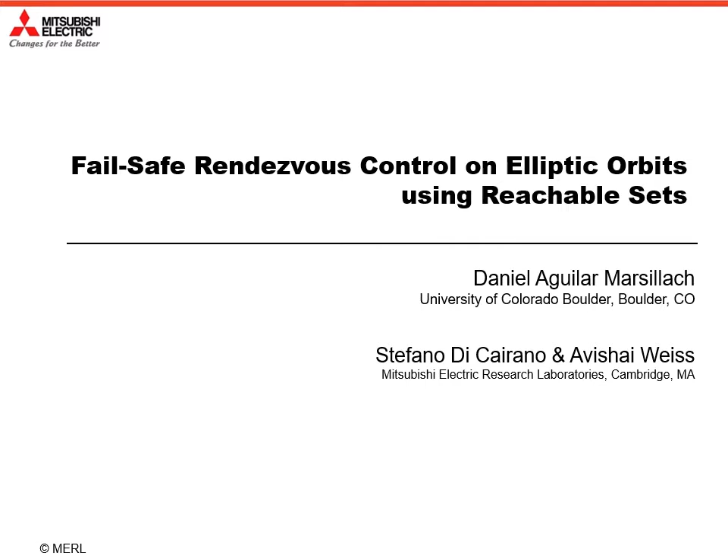My name is Daniel Aguilar Marsillach. I'm a PhD student at the University of Colorado Boulder in the Department of Aerospace Engineering Sciences. Today I'll be talking about the work that I did as a summer intern at Mitsubishi Electric Research Laboratories with Stefano Di Cairano and Avishai Weiss. This work is related to spacecraft rendezvous, and in particular I'll be talking about fail-safe rendezvous control on elliptic orbits using reachable sets today.

I just want to give a brief introduction of the rendezvous problem for spacecraft missions. We can see an illustration of that here on the top right, where we have the Dragon capsule by SpaceX going to dock with the International Space Station. So typically we have a controlled chaser, which would be the Dragon capsule here, which aims to move towards and remain near a target body. That could be the International Space Station, a different satellite, or even an asteroid like Bennu.

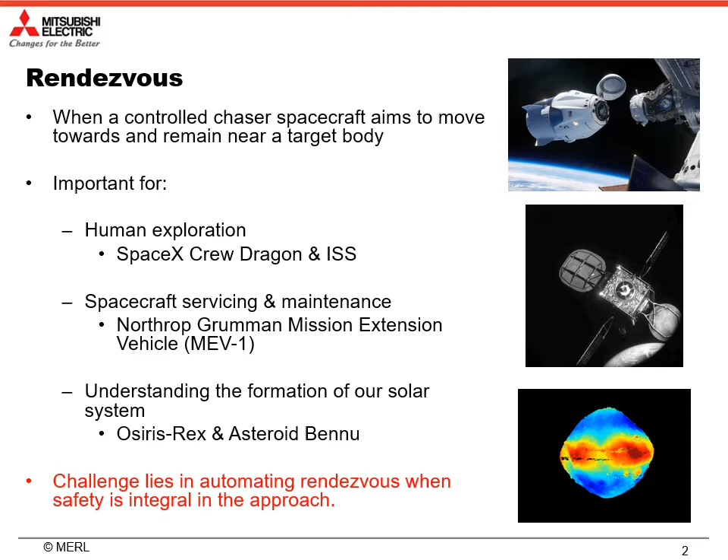And indeed, rendezvous is important for several reasons: to further human exploration, and for spacecraft servicing and maintenance, since we know there's going to be numerous satellite launches in the coming years. We're going to have record-breaking constellation sizes, and potentially some of these are going to require servicing and maintenance, which will inevitably require rendezvous and docking procedures. It's also obviously important for the acquisition of scientific data to understand our solar system. But the challenge really lies in automating this process, especially when you're trying to do this in an inherently safe approach. And that's the topic of discussion in this talk.

So here we have the rendezvous description. Geometrically speaking, we have the inertial frame that's centered at the center of mass of a central body. This could be the Earth. We have the chaser spacecraft and we have the target. These are their inertial position vectors. They are both orbiting the central body, and what is of fundamental importance really is the relative position vector of the chaser with respect to this target, since we will be using this throughout the safety analysis and ensuring that our safety is not compromised.

We also have a notion of a Hill frame, which is a special kind of coordinate frame that's attached to the target right here. It moves with the target along its orbit, so it's a co-moving frame. It's useful to map relative positions and velocities into this frame for visualization purposes, but also because we can see what the states of the chaser would look like as seen by the target. So we'll be using this throughout our implementation here and in the figures I'll show you later.

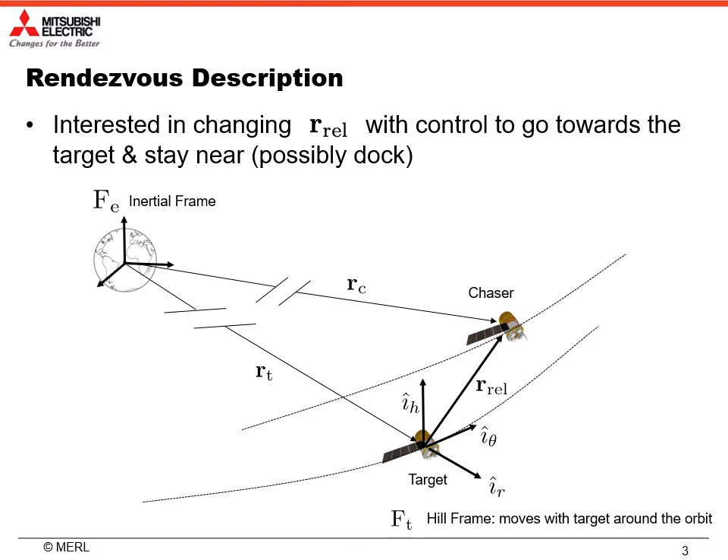So the goal of safe spacecraft rendezvous is really to minimize some kind of performance metric while satisfying your safety constraints. This performance metric could be fuel consumption, control usage, or something similar. The particular kind of safety we're interested in here is known as passive safety. This would be the case where, despite a total loss of control, your chaser would be on a free drift trajectory that avoids entering some sets. Those sets are going to be defined now as the approach ellipsoid or the keep-out sphere. They're both centered at the target, so in the Hill frame they're centered at the origin.

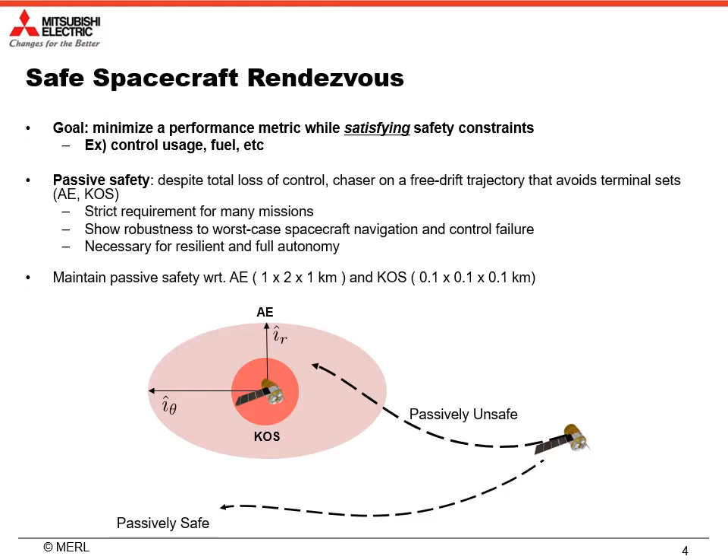The keep-out sphere is contained inside the approach ellipsoid, and we use these two sets to basically quantify and in some sense qualify safety. It's a strict requirement for many missions that we have to be able to guarantee passive safety of our trajectories or our approaches. And indeed, we'd be showing robustness to a worst case spacecraft navigation and control failure. So if we're going to have several spacecraft that are performing these rendezvous in an autonomous fashion, we would also want them to be subjected to these safety requirements, and we would want them to be able to guarantee this. So it's indeed very important for full autonomy to be able to ensure that collisions can be avoided.

So traditionally, passive safety is enforced through the design of trajectories offline and on the ground. This is done by understanding the orbital mechanics of the problem and going from there. Typically, there are several ways to do this, but you in fact just get a reference trajectory that you then track. Prior research in this area has then moved from going offline to an online implementation, where the idea would also be to deploy this on an autonomous spacecraft. And in this case, the safety constraints are enforced by propagating the current state at a given time forward to several future times, and ensuring that none of those states enter your terminal set S sub f, as we've denoted it here. This has been implemented in a convexified approach and using the full non-convex constraints, but in essence, you create a very large optimization problem.

Our approach is a bit different. We characterize the unsafe state space offline using reachable set theory. So this would be visualized by this area here. It's a 6-dimensional region of state space. And then online, what we're going to try to do is ensure that the chaser does not enter the unsafe state space, such that in the event that all thrusters fail, you would passively drift away from these sets and you never enter. Whereas if you were inside here, you would passively drift in there.

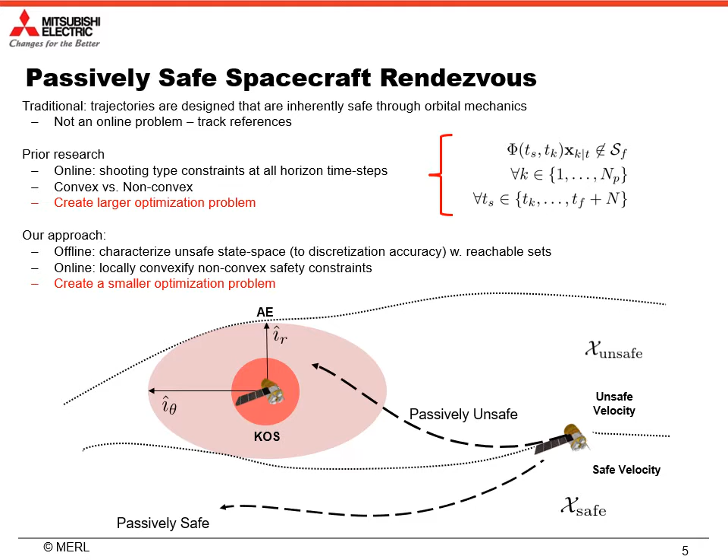And by doing this, we've created a smaller optimization problem that is easier to implement on board. So we actually characterize the unsafe state space by using backwards reachable sets, and we can do this recursively by these two equations. If we have a terminal set S sub f, which represents our approach ellipsoid or our keep-out sphere, we can successively calculate the sets of states that would enter the terminal set in a given number of time steps at the final time. And it's fundamental that we do this without any control because that's what passive safety requires.

Also, because the portion of the rendezvous that we're interested in happens so close to the target, linearization of our dynamics relative to the target is actually very accurate, but it also has the added benefit that it preserves ellipsoidal sets in the BRS computations if you have an ellipsoidal terminal set. And we can see this right here. So this would be a backwards reachable set between a prior time and the final time, and indeed it's just a function of your state transition matrix.

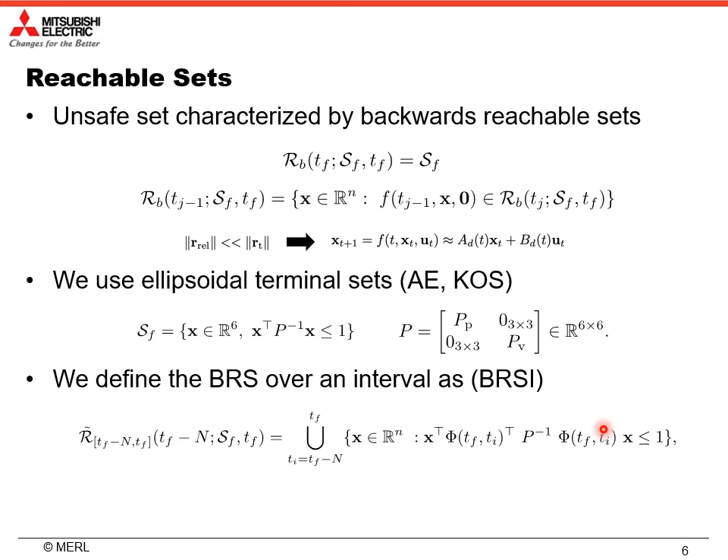And because our target is in an elliptical orbit, which is periodic since it's unperturbed and Keplerian in this case by assumption, we're going to get time-varying backwards reachable sets. So what we're going to see is that wherever you put an approach ellipsoid, let's say you put it either here or here, and you take a step backwards in time, or 2 or 3 steps, doesn't really matter, the ellipsoids that result from that mapping from a prior time to the final time are going to have a different rotation with respect to each other, and might also even be extended differently or amplified differently in some sense. This is a result of the time-varying nature of the dynamics here. So we would have very slow dynamics at apoapsis, so perhaps smaller changes on our ellipsoids here, and we'd have much faster dynamics at periapsis and perhaps much larger changes in our ellipsoids over here.

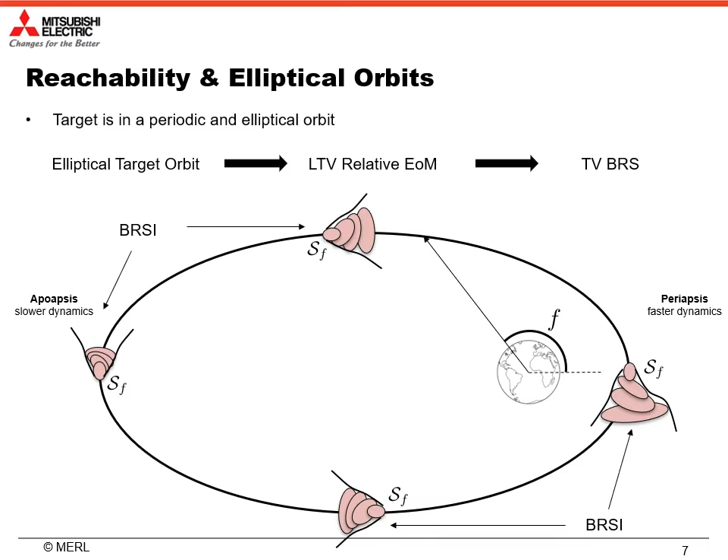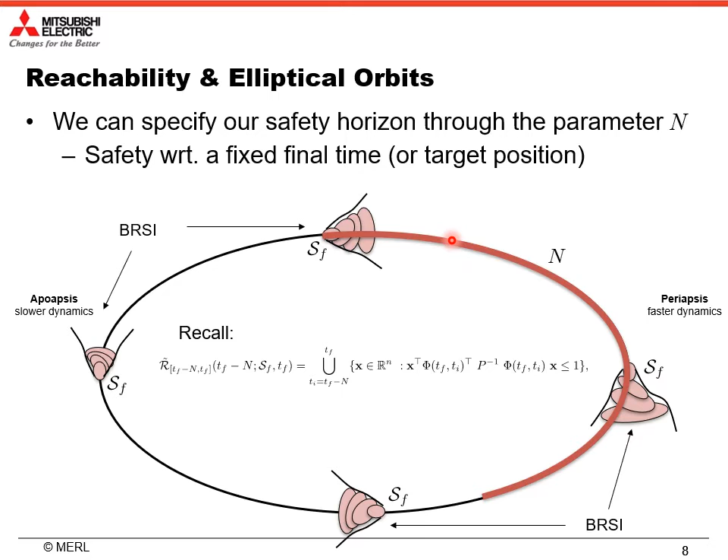So recall our definition of the backwards reachable set over an interval, where we found basically the set of states that would enter the terminal set in exactly n steps or less at this final time. So if we were to start here, and we've already defined a horizon n, or a number of steps n, then we would have found a set of states along the orbital arc, or relative to the target, that would slowly but surely be propagated naturally and end up going inside of the terminal set at this exact moment in time. We're interested in staying outside of this. So again, the backwards reachable sets are unsafe sets, and we're trying to stay outside of those. By being outside of those, in this case, if we just use this expression, we would guarantee that we would not collide at this moment in time. However, we could collide before or even after, so we have to take that into account in our analysis.

So if we want to be safe with respect to multiple target positions or along the orbit, we can parameterize that by the final time. That's why I'm saying we can be safe with respect to many final times. We need to take a union of the backwards reachable set over an interval. So at every moment in time, we have a different backwards reachable set over an interval because of our LTV system dynamics, and therefore if we take the union across the orbit or for a sub-portion of the orbit, we can at least maintain safety for a certain period of time. In our case, because we don't know the exact duration of our maneuver, we're going to do this for the entire orbit, because that way we can maintain n-step safety across the entire orbit, and we have just a general safety result. As a conservative measure, we're going to stay outside of this entire union of backwards reachable sets.

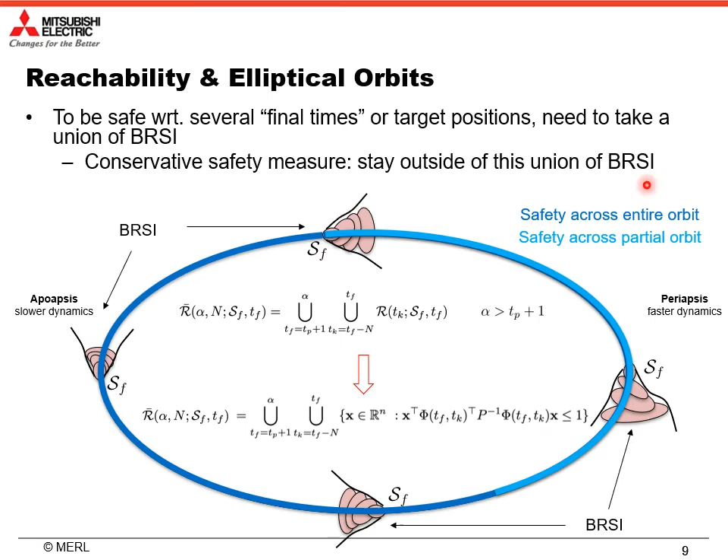We decided to use model predictive control in this work because the goal was to develop something that could potentially be used on board. So we need to have quick solutions. And if we have a linear safety constraint, which we will be talking about in the next slide, then this formulation just ends up becoming a quadratic program. And so once we solve that optimal control problem, we take the initial control and apply it on our full nonlinear relative equations of motion. So our control model is LTV, but our full simulation is done using the nonlinear equations of motion. And the QP is particularly important because if you're going to do this on board, you need to have something that is able to be solved quickly, and that's important for systems like satellites that have very limited computational resources.

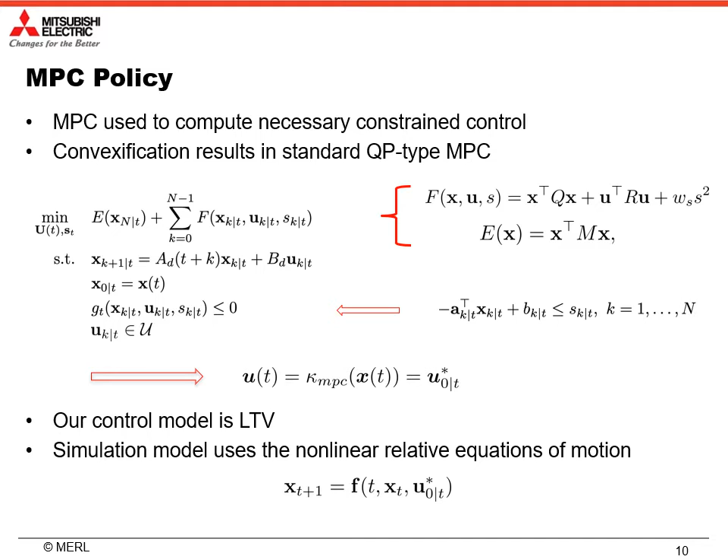So since we've already characterized the unsafe state space, which I'm showing by these weird ellipsoids on the right, we actually have a non-convex constraint. That is, every state in our horizon should be outside of this union or this volume of state space. We use an approach here that locally convexifies this safety constraint. So basically, imagine we had some states in our horizon. We project these radially onto that surface, and we figure out where's the point that is furthest away from the origin, because this would locally approximate the exterior of this union. And then we use the tangent at that point to set up a half-space constraint on every step in our horizon. We do this for every point in our horizon, and then we implement that in our model predictive control scheme.

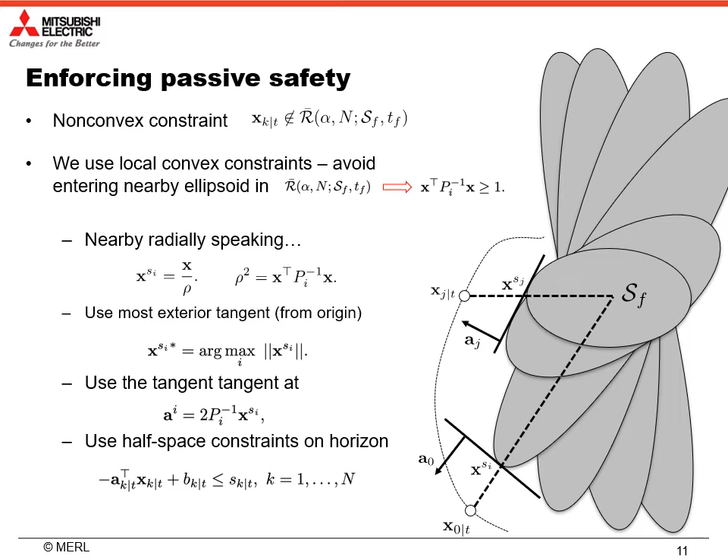So now that I've talked a little bit about the theory, I'll talk a little bit about how we implemented this in code in our algorithm. We've split the problem into really 3 phases, but the most important ones are these 2, where we first maintain passive safety with respect to the approach ellipsoid, and then we maintain passive safety with respect to the keep-out sphere.

So again, if we have an initial condition, we do all of our radial projections, we construct our safety constraints, and then we solve our QP, apply the control, update our state, and we repeat this until we enter a region that is near the approach ellipsoid, labeled by this bounding box, basically. Once we enter this region, we trigger the phase change.

And now, because the approach ellipsoid backwards reachable sets are a superset of these, by definition and construction, we are automatically going to be passively safe with respect to this one, as long as this was done appropriately and correctly, which we will show that it has been done. Then we repeat the same process, and again, once we get close to the keep-out sphere and we enter a bounding box around it, we trigger another phase change and we get rid of the safety constraints and we go to our final approach. This might mimic, for instance, or simulate the final docking procedure.

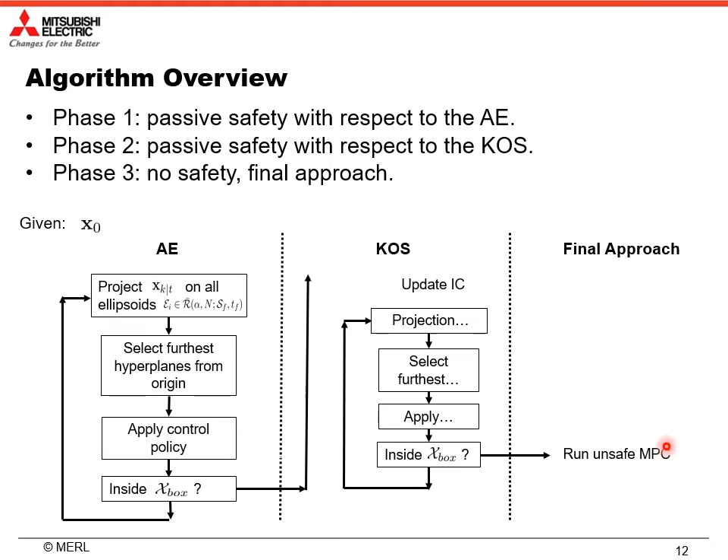And that's exactly what we see here. We see in the blue trajectory the implemented solution by the MPC. And if I were to sample particular points along this trajectory and propagate them forward without any control, they would drift away from the approach ellipsoid, as you can see here. Same happens once we enter the keep-out sphere phase. You see the actual passively safe approach trajectory, so we're getting closer, but in a way that if a failure occurred at any of these given moments, we would just drift away and we would never enter the set and collide with our target body.

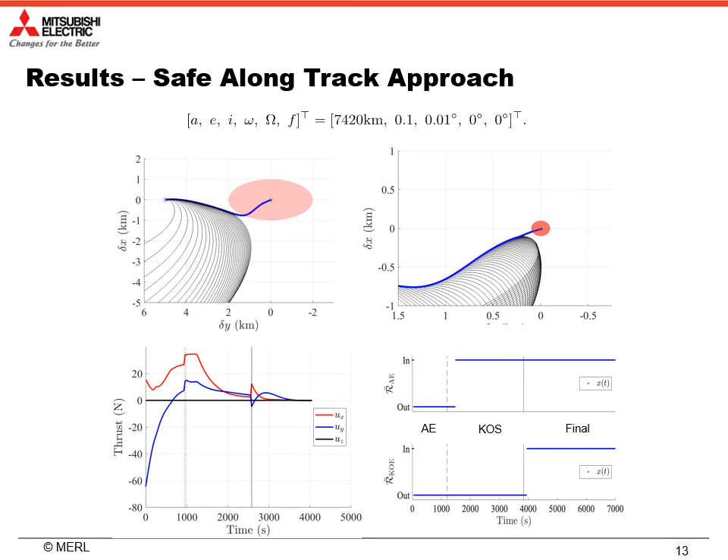We can confirm this by looking at whether our states along these blue trajectories are ever members of the union of backwards reachable sets. And indeed, they're never inside until we've triggered the phase changes in the mission approach. So we can show that we never enter, to the discretization level, those sets, and therefore we are passively safe.

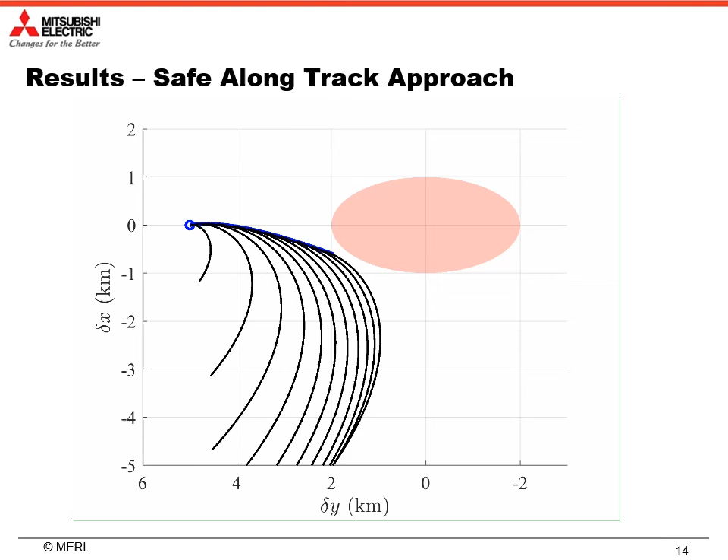So here I just kind of want to show an animation of how this works. We're approaching the approach ellipsoid in a safe way. We've sampled these trajectories. They drift away over time. Now the keep-out sphere phase begins, and the same process happens. As we get near it, if failures were to occur, they never enter the keep-out sphere. And then finally, we go in for the final approach.

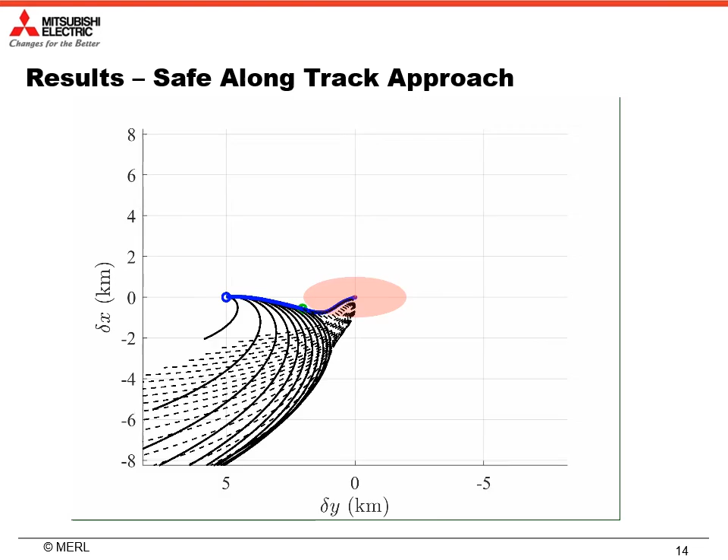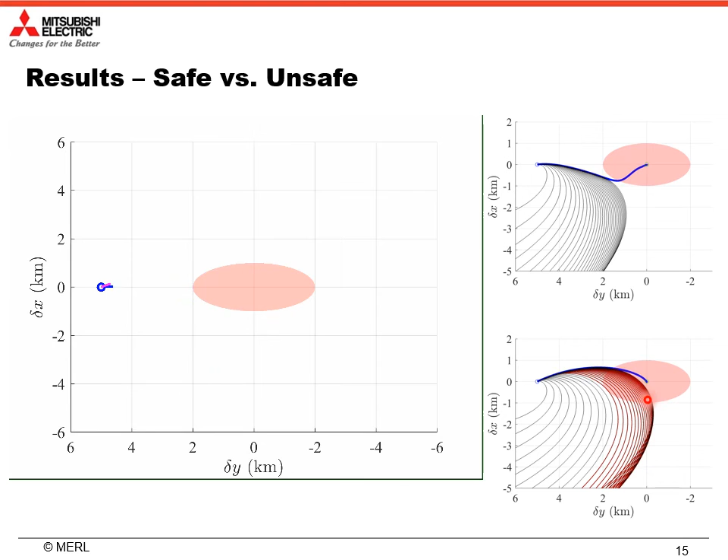So here I just want to compare the safe versus unsafe approach. The maroon trajectory in this animation is the unsafe one. And if a failure occurs at the exact same time, highlighted by this red dot, if you take that state and propagate it forward passively, we see that in this bottom case, it passively enters the set, and in the top one, it does not. We can see more examples of samplings that are unsafe right here. So we have several states that, when sampled and propagated forward, would enter that terminal set.

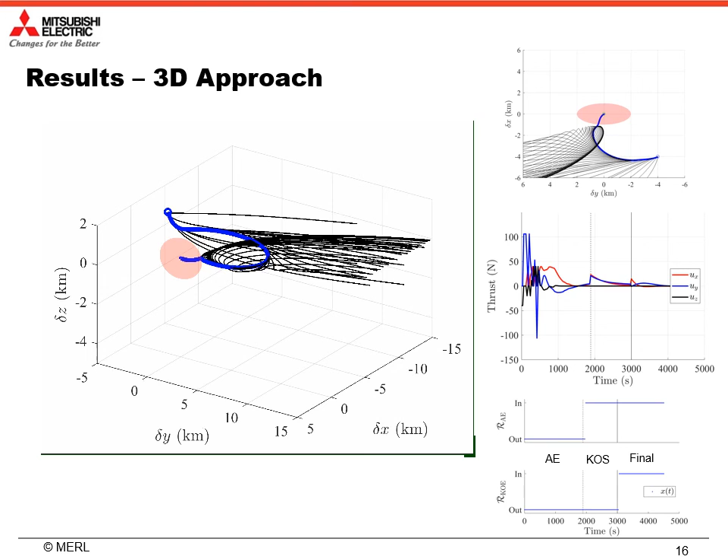So in conclusion, we've developed a fail-safe control policy for rendezvous on generic elliptic orbits using backwards reachable sets. So we've been able to demonstrate and show that in the event of total thruster failures, we prevent the chaser from colliding with the rendezvous target or the approach ellipsoid or the keep-out sphere. And therefore we are passively safe and will not have collisions in the event of that worst case failure mode.

And future work will look into extending this to active safety, and we will be demonstrating and showing the existence of abort maneuvers once we've entered the keep-out sphere phase for that final approach.